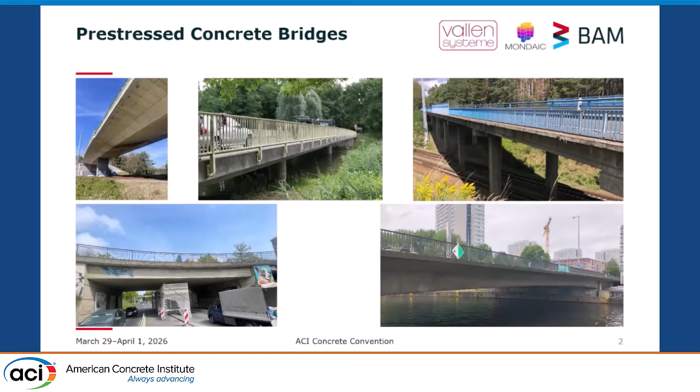Bridges, we need them because we have to gap streets, everything that you can think of. But pre-stressed bridges are used everywhere. And everywhere means in the big economies. Here in the US, for example, about 41% of the bridges are pre-stressed concrete bridges. So it's relevant. It's the same in Germany. We have there also around 40% pre-stressed concrete bridges, and the same also in Japan. So it's really a relevant technology, these pre-stressed concrete bridges.

And just in Germany, to have an idea, we installed in the last few years more than 50 bridges with acoustic emission for wire break detection. So for Germany, a small country, at the end, it's a big number.

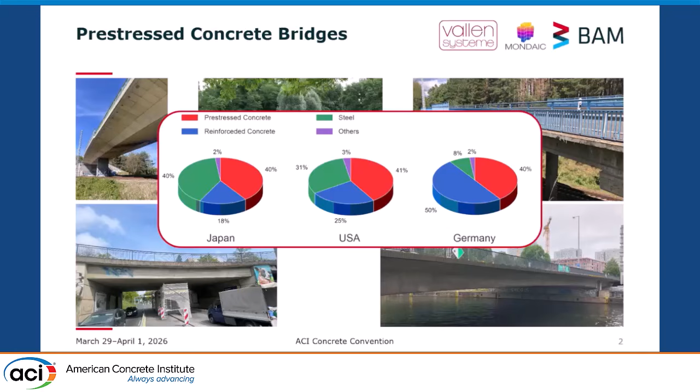Bridges basically are designed to last for 80 to 100 years. But since the unexpected collapse of the Carola Bridge in Dresden, I think most of you know about this, the weaknesses of this approach from 60, 70 years ago are obvious, because pre-stressed concrete bridges were built, for example, in the 1950s, 1960s, and the lack of experience in the early days of this technology led to an underestimate of traffic and temperature load. They didn't expect these high temperature loads because of climate change, these high loads because of the trucks and everything. So that's a big issue, because they are basically not designed for these loads.

Also, problems with groutings, joints, and sealings have popped up in the last years. Stress corrosion cracking is a big topic. And the insufficient non-tensioned reinforcement is also one of the, let's say, weak points that bridge engineers figured out in the last years really makes trouble.

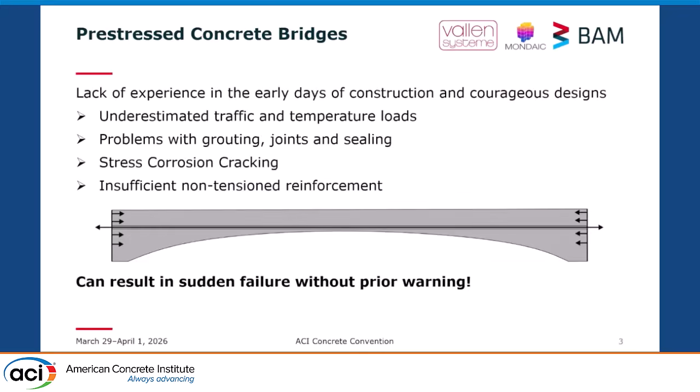So, the only reliable and efficient method, that's what we figured out also in Germany, is acoustic emission testing for wire break detection. It enhances warning prior to failure, because in Dresden, the bridge just broke down. There was no warning. It was under investigation. Many bridge engineers did their work there. They did great work, but it was simply a failure without warning.

That's why in Germany, in 2024, the German Society of Non-Destructive Testing released a guideline for the detection of wire breaks with acoustic emission. In this first framework, which is established now in Germany, they address owners of the bridge, which is important. They address the providers of monitoring, operators, engineering companies, so all the parties that are involved in monitoring of this type of assets.

And finally, it provides a detailed instruction for tendering, because it's important to understand that an owner doesn't know anything about acoustic emission monitoring. So they need a guideline to really develop a tender where they definitely get an acoustic emission system and not something else.

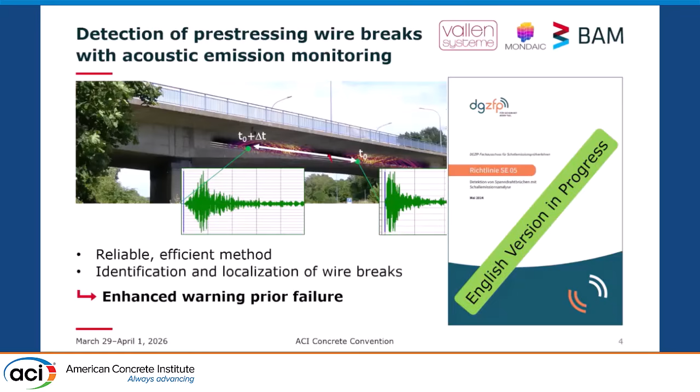To optimize the process for monitoring, to reduce the costs of monitoring and to increase the reliability of the data analysis, we started a project called SimAS. We, that means BAM, under the lead of Stephan Pirskawetz, Mondaic, and our company, Vallen Systeme.

BAM, in principle, is the expert for the application and also for acoustic emission in civil engineering. That's why this part was very important for us, that BAM leads the project and knows exactly what is needed in the field. Mondaic is the expert for cross-scale simulation and imaging of sound propagation. I know we always talk about finite element simulation and so on, but here we really talk about large scale, and they have a special technology to simulate on large scale.

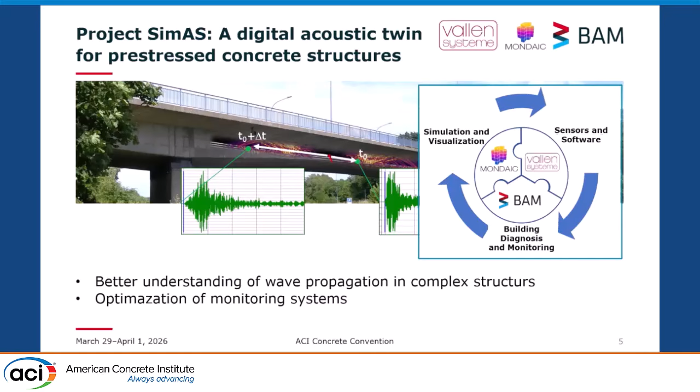And we, Vallen Systeme, are the expert for acoustic emission sensors and data acquisition systems. So let's say the real world data that you need to get a picture of what is going on in the bridge from the perspective of acoustic emission. What we developed under the lead of Stephan Pirskawetz was a 6-step procedure to get a digital twin with this scope. Step 1 is structural analysis.

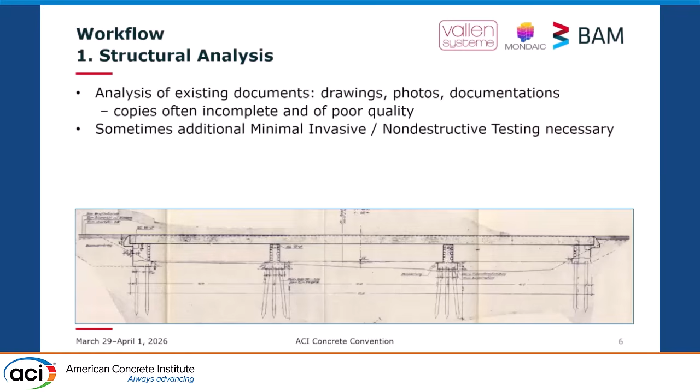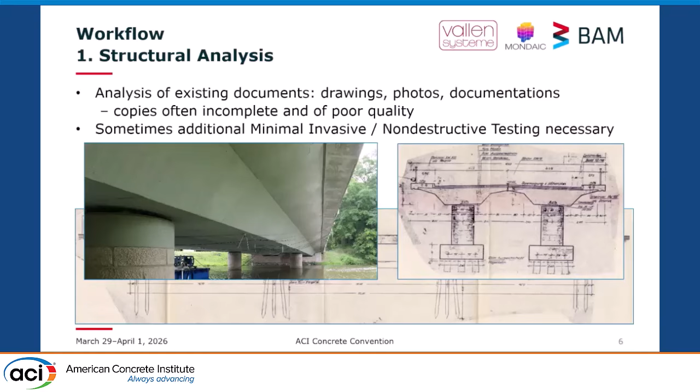You're all in the analysis of these structures, and you know documents are often not updated, photos are very old, often incomplete. That's definitely an issue. They are sometimes of low quality, so you can't really see the details of what is going on there. And sometimes you also have to do some NDT on-site to really get a first picture of the asset, of the bridge.

The second step is the 3D modeling, really to get a digital twin of a bridge. You have to understand you have different shapes, different sizes. You can see here the cross sections, for example, they are different, and this is very time consuming. So it's expensive at the end for the owner to get all these models. That's why at BAM they developed a wizard for 3D modeling, which is quick and easy, to get a first draft of it.

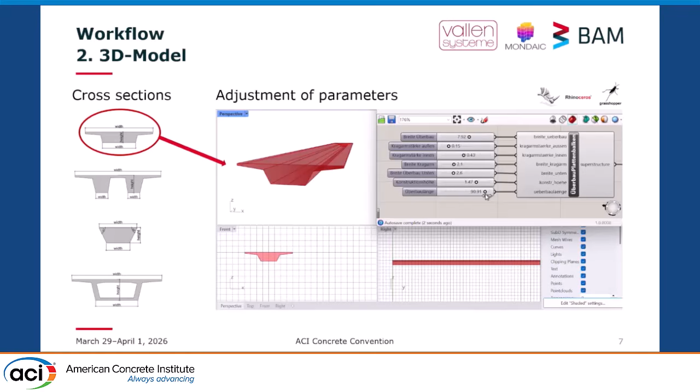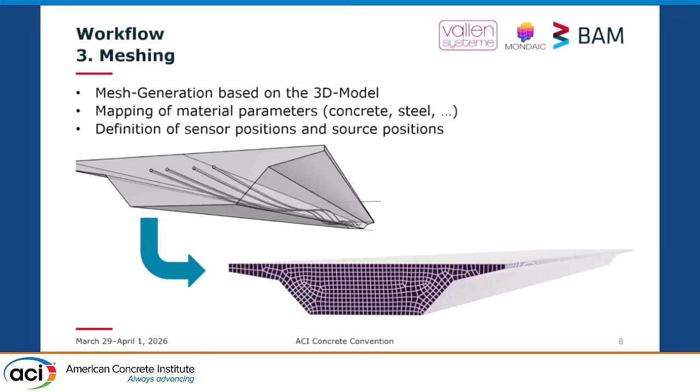Meshing, you all know how this works. Based on the 3D model from the previous steps, you generate the mesh, and then you add the mapping for the material, if it's concrete, if it's steel, whatever material you have. And you also already define the positions of the acoustic emission sensors, for example. That's the input for the simulation finally. And the size of the mesh element also defines the efficiency, that means how fast you can simulate this large scale structure.

Simulation. The simulation calculates the wave propagation and displacement magnitude on the concrete block, because acoustic emission waves propagate through the material, on the surface of the concrete, in the concrete, and that must be simulated in a very good way. Usually, to do this, we simulate rebound hammer impacts, and that looks like this. You have seen the impact hammer, and here in the simulation, you have a few different views.

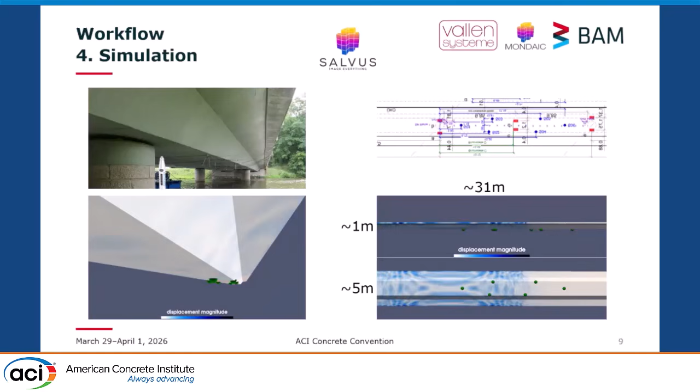You see how the waves propagate after the impact of the rebound hammer. You can see on the right-hand side the two views. One is about 1 meter height, the other one is 5 meter width. So that's how they are propagating. And the green dots on this simulation are the definitions of the acoustic emission sensors. So you've done the simulation.

And in the next step, to, let's say, calibrate the model, you need to do real-world measurements. Because the real world is always a little bit different, and the simulation needs some more input to get results which are close to what the reality shows.

With acoustic emission, that includes the measurement of the acoustic emission background noise on the bridge, if you have traffic and all of these background noises that are coming from different sources. You also acquire data from, for example, the artificial source, a rebound hammer. So you also get data from this.

And you also extract wires. I'm not sure if this is very common here in the US, but in Germany, they usually also open the bridge in one position. Then they cut out a few of these pre-stressed wires. And at the same time, they have acoustic emission sensors around this area and acquire this fingerprint of this breaking or this cut wire. That's very typical, and that's also how they define it in the German guideline.

Most of the time, they use this part that they cut out to go into the lab and make some analysis on the material and on the behavior of the material. But that's the typical procedure for the real world data that you need to calibrate the model.

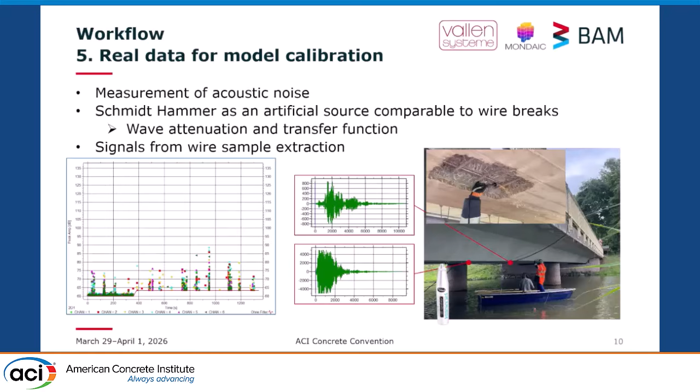And in the last step, you have to fuse the data, because if you have two worlds with two different file formats and everything, you just can't compare it. And that's not a digital twin. So you have to bring this data into one database. We use here a database format that acoustic emission is anyway using. We feed in the data of the real world and the simulation data in one database format, and then we can use the tool chain that we already use today to analyze the data, to visualize the data, and to characterize the parameters of the structure for acoustic emission.

And what you can see here on the top side is the real data. You can see in the time domain the arrival times approximately, and you see there is more high frequency content in this data. You can see it here, if you look here. There is more high frequency content in the signals.

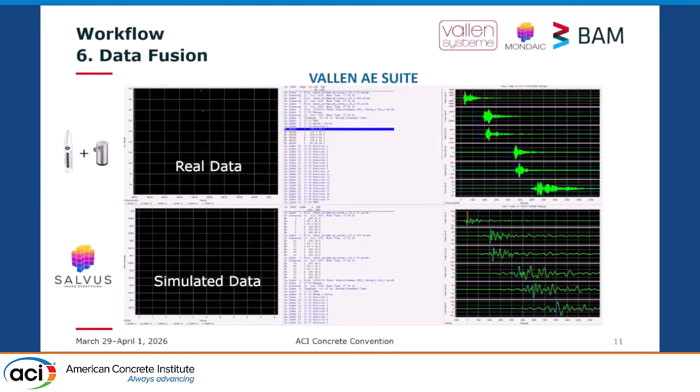The simulation data has more low frequency content, but that's because at the moment, the simulation can cover up to 30 kilohertz. That's the trade-off at the moment; we have to improve this to have more high frequency content as well. But the good thing is the arrival times are already very close to what we get from the real world data. And that's the first step to really correlate simulation and real world data.

And why are we doing this? Because the next step, forward looking, we want to have for sure the forward simulation. That means you have like a rebound hammer or wire break, you simulate this from the source and you check if the sensors are picking up a similar signal like the acoustic emission sensors from the real world.

But on the other hand, what we are also working on together with Mondaic is the reverse simulation. Reverse simulation means you take the data acquired from the real world, feed them back into the simulation of the sensors, and then you try to do wave field focusing with the simulation to figure out where it is coming from.

Plus, with this wave field focusing, we also want to build up kind of a database of different failure mechanisms. So to say, okay, this is more or less a wire break, this is maybe some other source, to make the analysis of this data much more reliable and easier to interpret, and that should finally also save costs at the operator side.

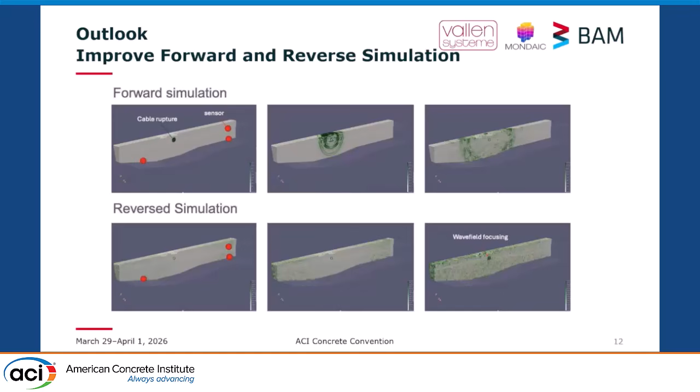Well, that was a short intro into our project.